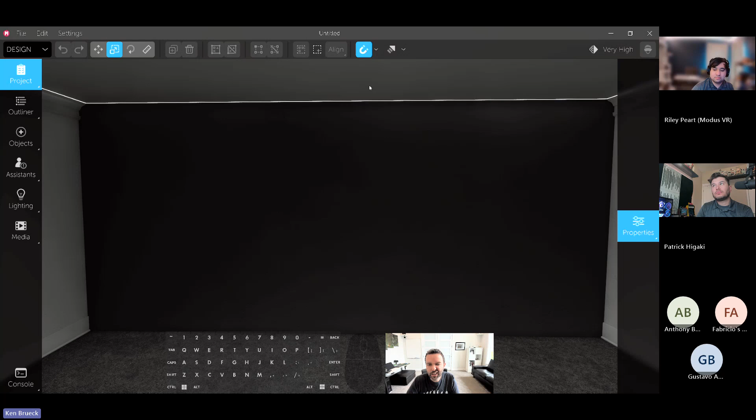The second thing in terms of getting stuff set up is the viewport quality. I came into this room and it is almost pitch black, and that's because we have no lights in the room and we are simulating pretty high quality lighting. So I'm going to go up to this top right corner where it says very high, and that might say medium or something for you. Basically, this is the quality in which Modus is rendering while you are working in Modus.

If we drop this down into med high, the lighting that gets created here is of much lower precision. In fact, you'll even have a perfectly bright room with no lights in it. So this is a great way to get started, but also this is a great way to control the performance requirements of Modus. If you're in a lower quality mode, you're going to have better performance because your computer's not doing as much.

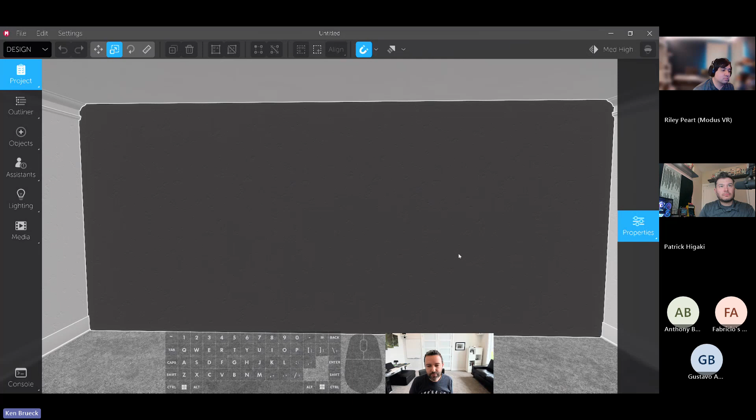Okay, so the next thing we need to talk about is navigation. Now that you have your viewport and UI set up, there are two modes in Modus. There is interaction mode, where I'm working with menus, maybe dragging objects around, and then there is navigation mode. To get into navigation mode, I can press M, and that hides my menu, and now I can look around, or I can just hold the right mouse button to temporarily get into navigation mode.

That's all I'm going to be doing throughout the rest of the webinar, is just holding that right mouse button. Once you're holding it, you look around by moving the mouse, and then you go forward and backward by pressing W and S. You go side to side by pressing A and D, and you go up and down by pressing space and shift. You'll get really comfortable with those over time, but that is it. So again, hold right mouse button to enter navigation mode, then W, A, S, D to go forward, back, left, right, and space and shift to go up and down. That's it for navigation mode.

Now taking a look at the UI here for a moment, in the top left corner we've got design mode. That's where we're going to spend the entirety of the webinar. But if you switch over to photo or 360, which we'll cover in an upcoming webinar in a couple of weeks, that's where you can generate high quality renders or 360s.

Up along the top here, we have lots of buttons for changing modes, deleting, duplicating, turning into arrays, stuff like that. We'll cover these throughout the webinar as we go. And on the left side, we have all of our main tabs for working with the project.

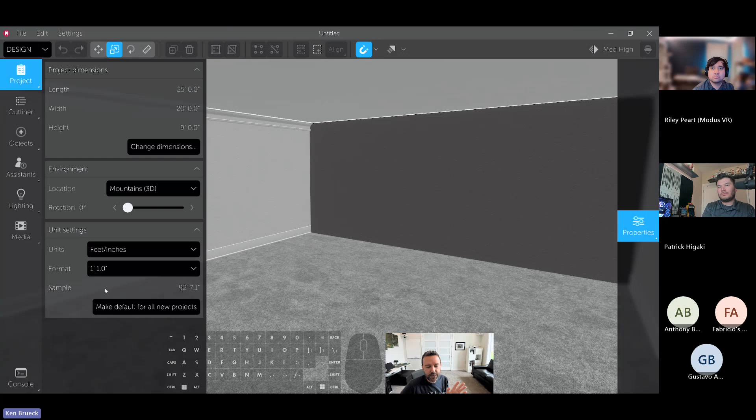First things first, I'm going to change the dimensions of this project. We're going to operate in feet and inches, so I don't need to change this, but this is where you would do it if you wanted to work in metric. Let's change this to be 18 feet wide by 23 feet, and then we'll increase the ceiling height to 10 feet. It's going to fade down, fade back up, and now our room is slightly different.

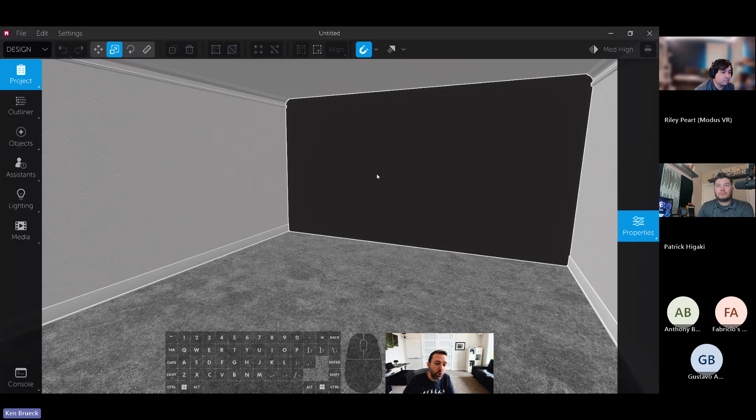Now I'd like to spend a little bit of time dressing the room, getting it ready to add equipment. This part isn't critical, but it does really help sell the story. With Modus, it is such a fast tool, and it is AV focused. You can bring it into basically any scenario where seeing or validating results is going to be helpful.

For example, we see Modus used a lot in pre-sales or even just in conceptualization, trying to see if a certain idea will work, all the way through to generating really polished, high quality deliverables that might go in a room standards package or something like that. Really, it's up to you in terms of how much time you want to spend on any given project, but we think it's usually best to try and spend as little time as possible.

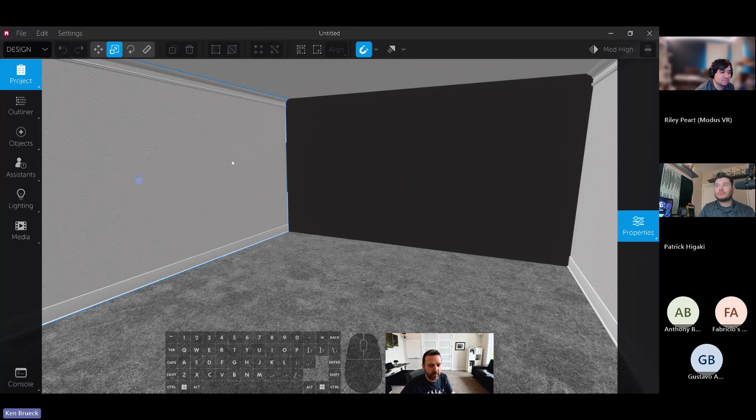Really be disciplined about how many details are important. But to get started, I'm going to select all these walls. I'm going to control click and move around to select all four. And I'm going to come over to the properties panel. To get to that, I just hover over the right side of the screen, and the properties panel is going to change based on what you have selected. So in this case, I have 4 walls selected, which gives me options for the walls.

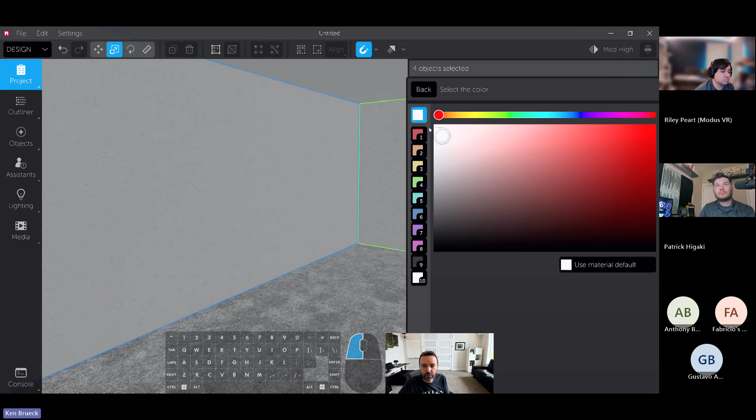I'm going to turn off the trim and baseboard. We're going to keep the material the same, but I am going to change the color so that they are all white. Now I'm going to click on the floor to select it.

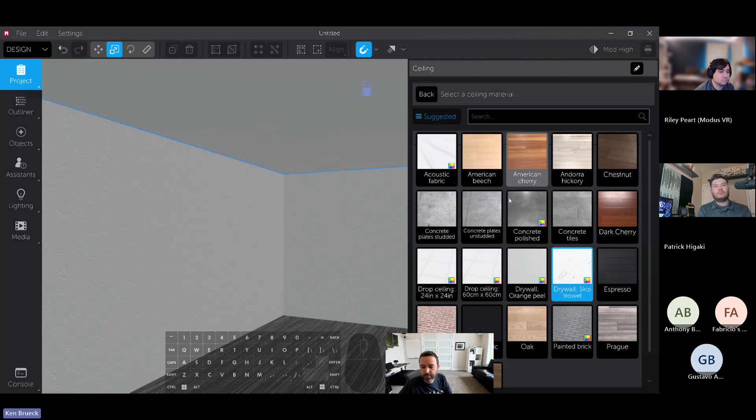I'm going to change its material. When I click on that, by default, I'm going to see just kind of the suggested options for this. But if I wanted to change this to something else, I could hover over here and go up a level and find hundreds of different materials to choose from. But I'm just going to select that carpet, and then I'm going to make our ceiling a drop ceiling. I'm going to pick the 24-inch version since we are doing this stateside for now.

Let's start dressing the room. So I'm going to come over to our objects tab. Modus is an object-based workflow, meaning we're not dealing really with low-level vertices or lines. We are bringing in functional objects.

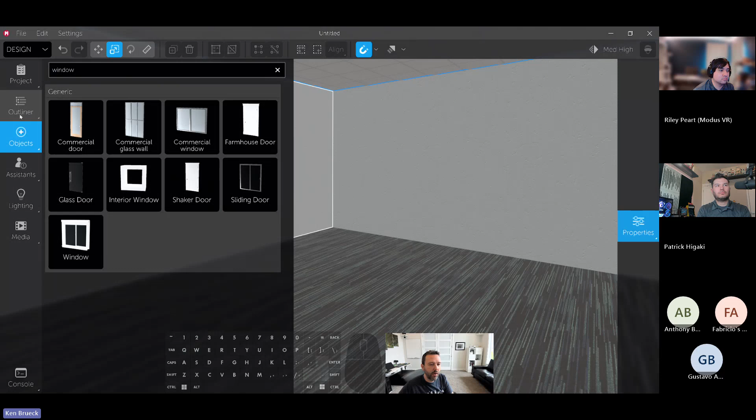So I'm going to type in window here, and I'm just going to drag one in and stretch it out. You'll notice a few things that happen right away. Anytime an object has these little cubes, those are resize handles. So I can grab them, and maybe we'll make this glass fill the entire wall.

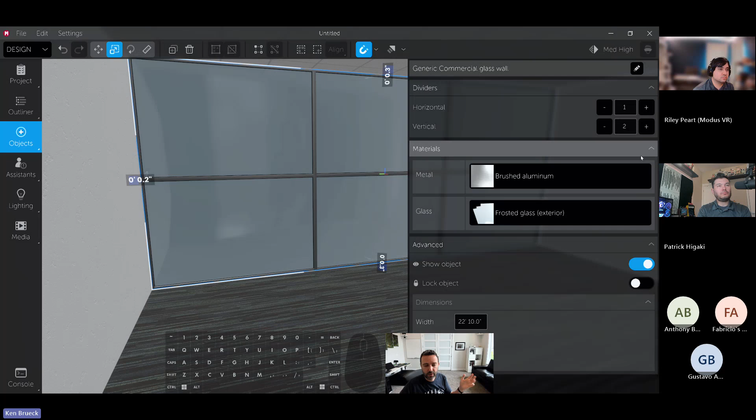Now I'm going to go to the properties panel and see what options I have available here. So these are going to be very different than the ones we've seen so far. And I'm going to change the dividers up just to change the way that looks a little bit. And we're going to keep the metal the same, but I want to change the glass to something transparent so we can see outside.

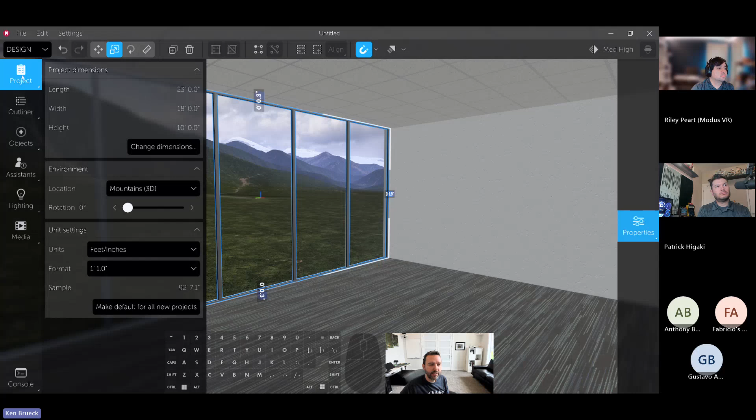This is the first bit of outside that we've seen, and this mountainscape doesn't really match what we would want to show in a commercial environment. So to change that, I'm going to go back to the project tab. I'm going to change our environment from mountains to, we'll do waterfront. We can rotate that a little bit. Okay, so that gives us a little bit nicer of a view.

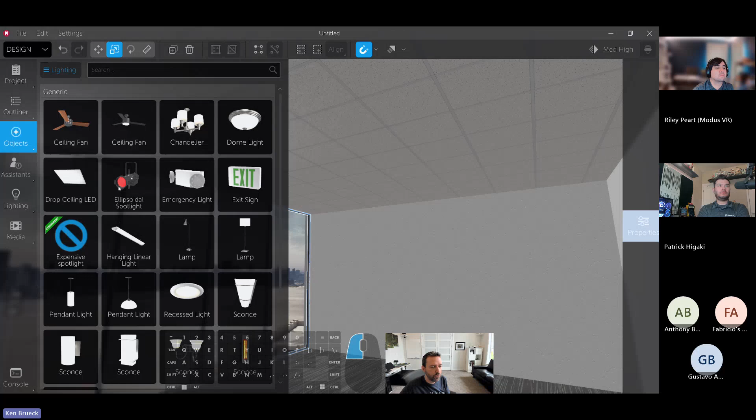Okay, now let's add some lights to the room. So I'm going to go back to the Objects tab, and instead of typing, we're going to navigate. We're going to come over to Lighting, and then we'll do Drop Ceiling LED. So I'm going to toss this on the ceiling.

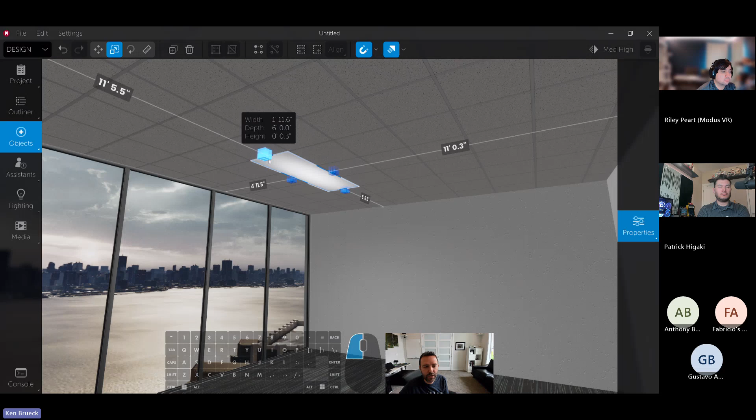Again, I'm going to resize it here a little bit. And since we're working on a 24-inch by 24-inch grid, I really don't want this free resizing. I'd rather it snap to something more useful. So I come up here to incremental moving and sizing. I'm going to enable that. And by default, it's going to set me up to 1-inch increments, but I'm going to put it over to 6. So now when I resize, it's going to snap the dimensions of this object to the closest 6 inches. So now I can get that right where I want it.

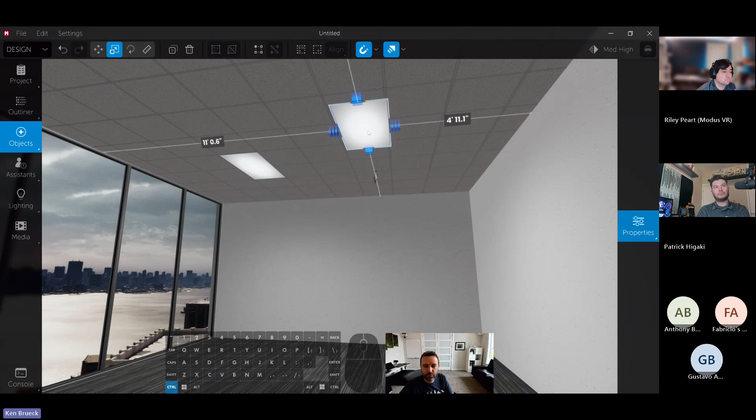And now we need to create multiples of this light. So we've got a handful of ways that we could do that. One, I could just select it and then do Control C and Control V, and that's going to put a light fixture wherever my mouse cursor is. I'm going to hit Control Z a handful of times to undo that. But in this case, I really want to arrange these in a grid and not have to place each one manually. So for that, I'm going to use an array.

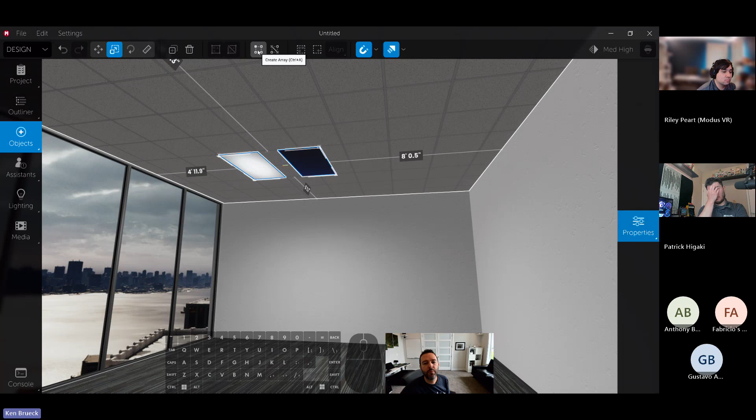So I could press Control A, or I can click this button up in the UI. Once I've created an array of that object, now the thing I have selected is an array, not the light. The light is the reference for building out the array. I'm going to back up here a little bit, get to a slightly better spot.

And we know which one is our reference object because it's full color, and then any copy or clone has this grayish tint to it.

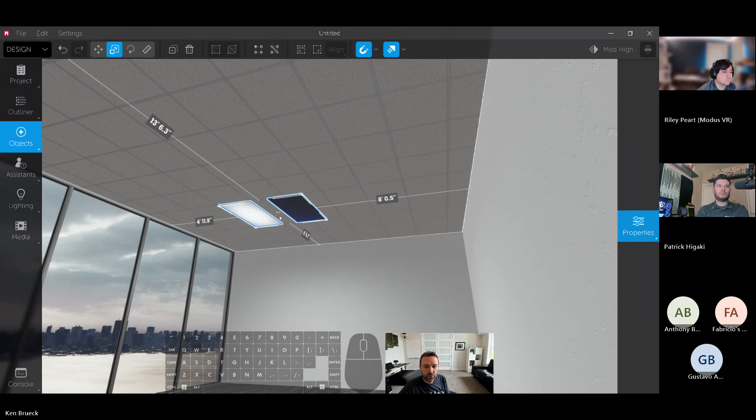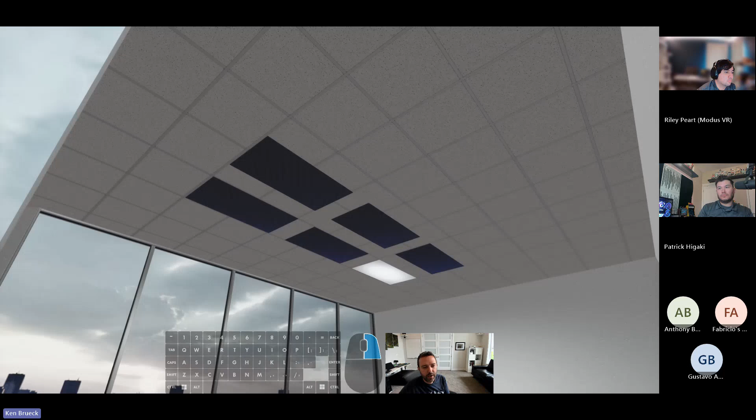But let's say we wanted to have 2 lights along the width of the room and then 3 rows along the length. So I've just updated this, but it's shooting off in the wrong direction. I want it coming towards us rather than away from us. So on the red axis, I'll click flip direction.

Now they're in the right direction, but the spacing is wrong. I'm going to change spacing to 4 feet. Let's see how that looks. Let's change that to maybe 8. There we go. And spacing this way, we'll try 4 feet and see—that does not work. Try 6 feet. Okay, that works.

So once again, now that we have an array of multiple clones, we can see which one was the reference object—that's the one all these clones are created from. When I deselect the array and select something else, they will all look normal.

Okay, so now our room is pretty well lit. At this point, now that we have lights in the room, I want to switch back to a higher quality viewport mode. I'll come up to the top right corner and bring this over to high, or even very high.

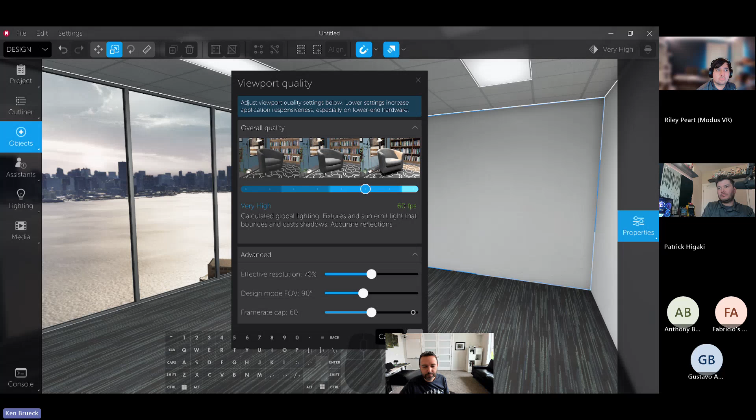Now, once we're in this mode, the change right now is a little subtle, but as we add objects into the room we'll start to see some nice shadows. One change we can see immediately is sunlight.

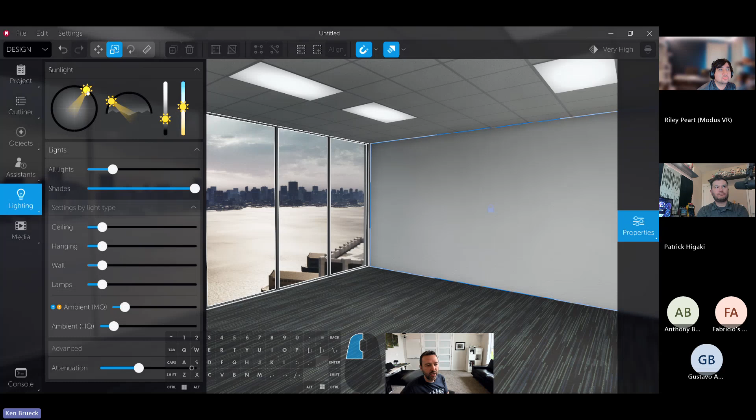So to change that, I'm going to come over to this lighting tab. The lighting tab allows you to control the overall look and feel of the room with respect to lighting. The first thing we're going to do is rotate the sun so it's actually coming and shining into the room here. We have 2 controls for changing the direction of the sun: this is basically the sun orbiting around the Earth, and this one is the sun's elevation.

If we pull the elevation down, we're going to get nice long shadows. If we want it to splash onto a different wall, we'd rotate it. But I'm going to have it splash onto the front wall, because that's such a pesky problem once it lands on a screen, so it's really important to bring that up.

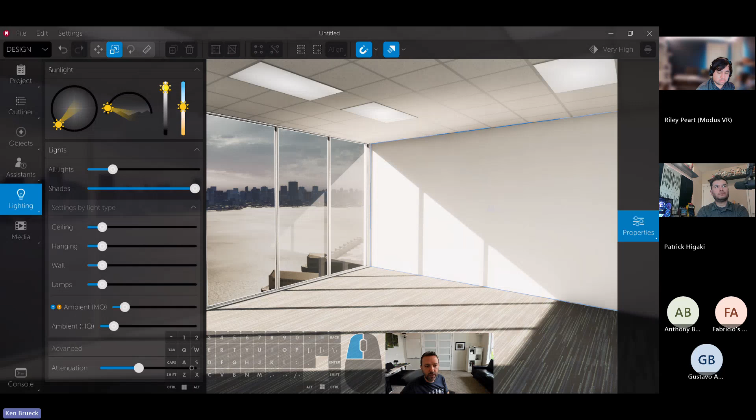And then for artistic reasons, you can increase the brightness or temperature of the sun as well, but usually the defaults are pretty good. The sunlight only shows when you're in one of those higher quality viewport modes—same thing when you're doing renders or 360s.

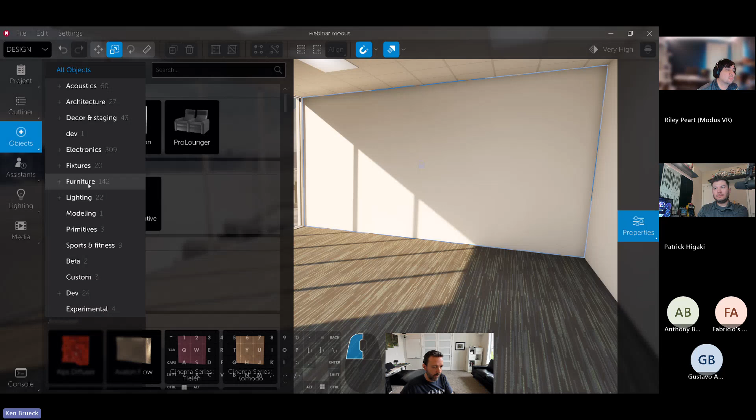Okay, so let's start adding some furniture. I'm going to come back to furniture, tables and desks, and we will add a salamander trapezoid table. So I'm going to put this in place. You'll notice it's facing the wrong direction.

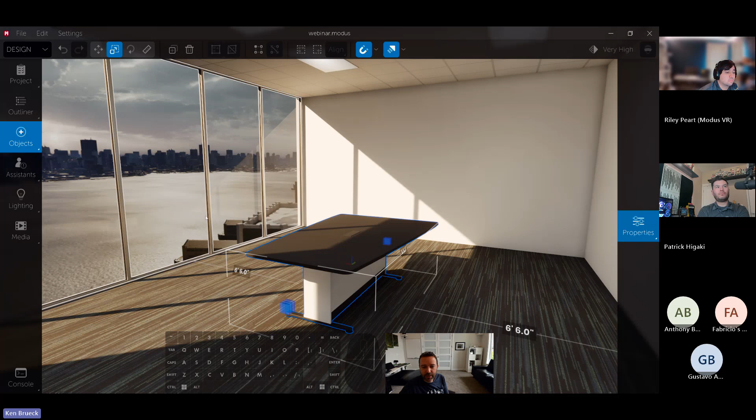I can use my mouse wheel to rotate the direction it's facing, or switch to a more explicit rotation mode with my cursor. Right now we're in resize mode, as indicated by these handles, and I'm actually going to turn off incremental sizing here for a moment. We can also switch to rotation mode by pressing R, which gives us a much more fine-grained amount of control over the rotation.

While we're looking at this, if I wanted to, I could click on this and enter an explicit value, but we're not going to do that. I'm just going to use my mouse wheel, get this in place, and we're in pretty good shape, but this table is not quite the size we want.

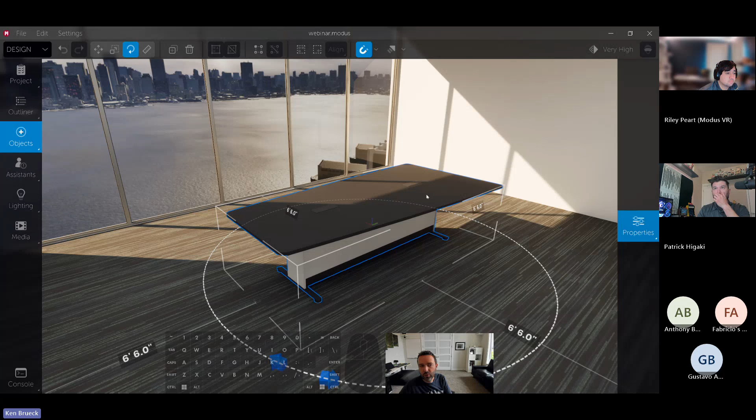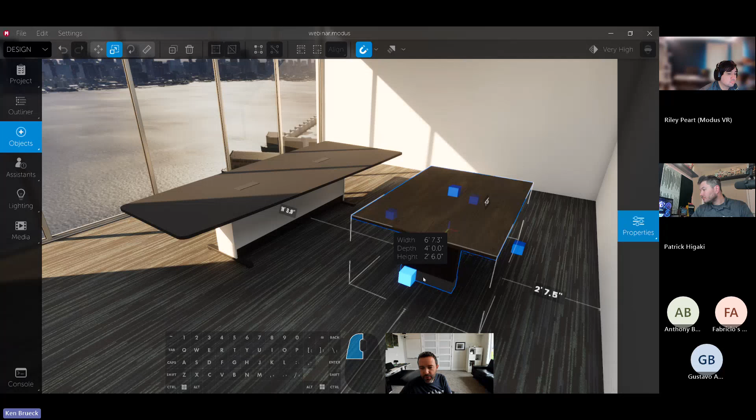So I'm going to press E to go to resize mode, and something interesting is going to happen here. As I resize this table, you'll notice it's snapping to different lengths. If I compare that with a generic table, this starts to show us a really interesting concept in Modus: when I have a generic table in there, I can resize it fluidly to any dimension I want.

I can come to the properties panel and make it any material I want. I could make it out of felt, I can make it out of brick. We can do any absurd thing we want because it's generic.

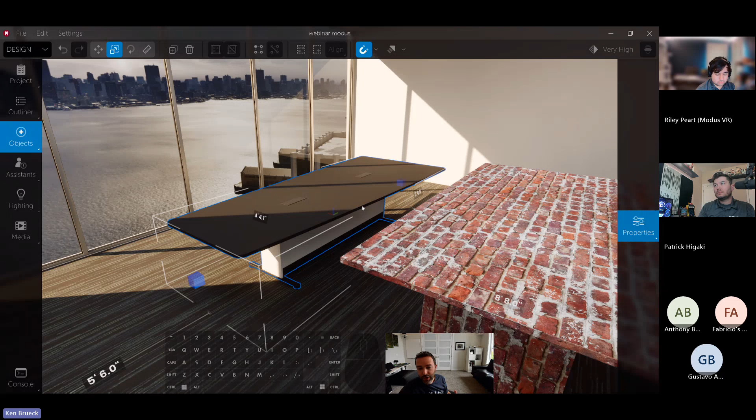Real world products like this Salamander table, or any other branded product in Modus, are restricted in the options presented to you, so you can never configure something that you couldn't actually buy. When I come to the materials options of this table, I only have the options that Salamander sells. I can't configure this to look like it's made of brick or felt. Same thing with the cabinet options.

That looks pretty good. I'm going to delete that generic table, but it's important to understand that duality of real world manufactured products and generic infinitely flexible products exists across all product categories. So cameras, microphones, couches, you name it. We often have both generic and real world products.

In this case, I've moved the table off to the side, but I want to bring it back to the center of the room without changing its offset from this front wall. That's where we get to axis movement mode.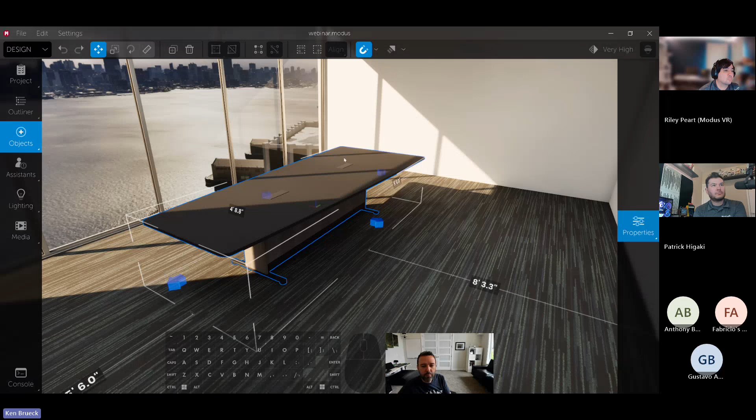So we've been in resize and rotate mode. Axis movement mode gives us a different set of handles. If I grab this table just anywhere on the top, I can move it around freely. But if I grab it on one of these arrows, I can only move it along that arrow's axis. This is a great way to have a little more control over your movement.

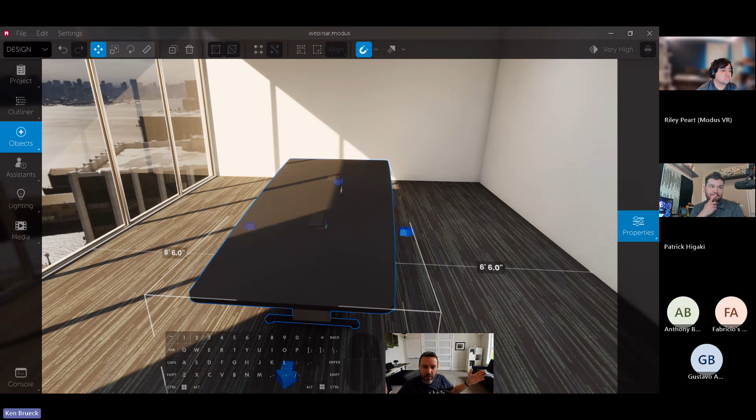I'm going to slide it over until it snaps into place in the center. We're not going to talk a ton about snapping, but the core concept behind it is it's all based on rulers. When this snaps to the center of the room, it's actually snapping in between two objects on both sides. So snapping is based on when these ruler values match, or when they become zero, they will snap to that surface.

You can control all of those things up here in the snapping options. You can change which axes are responding to snapping rules, or click that button to disable all snapping completely. Finally, you could also hold Shift temporarily while dragging to disable snapping.

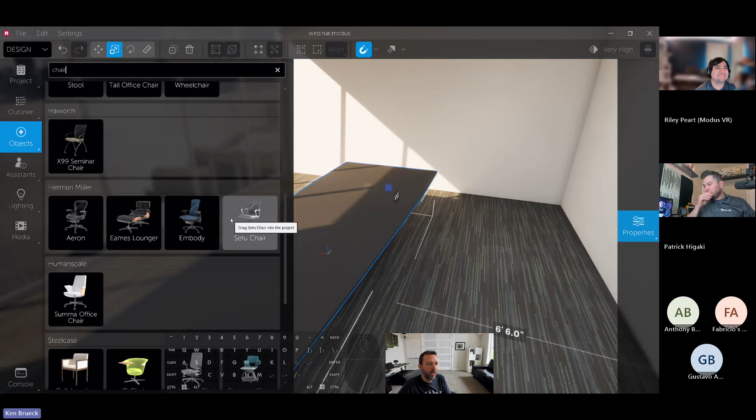All right, so I'm going to bring in some chairs here. Just going to drag one in, use my mouse wheel to rotate. And then another quick way to copy items: I could Control C and Control V to toss these wherever I want, but then it's sometimes a little hard to know where they're going to end up. You can also hold Alt and drag, and every time you redo that operation you're going to get a new version of that object. Then mouse wheel to rotate. It's a really quick and easy way to get multiple copies of something out there.

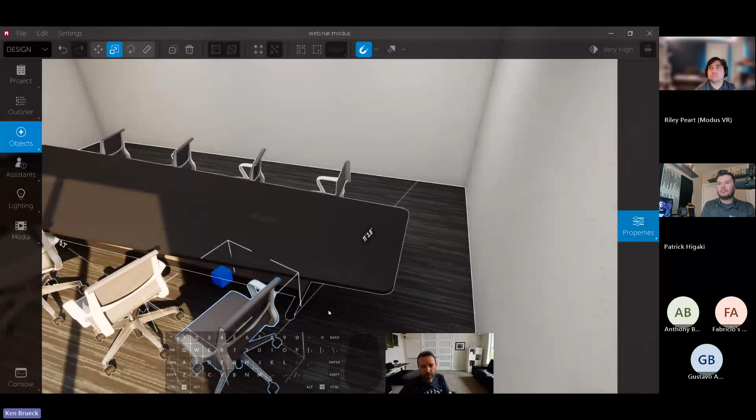And I made this table too long, let's shrink it a hair. One more back there, okay good. And a door... oh no, that's unfortunate, we really need a door. Okay, alright, so I'm going to quick save again.

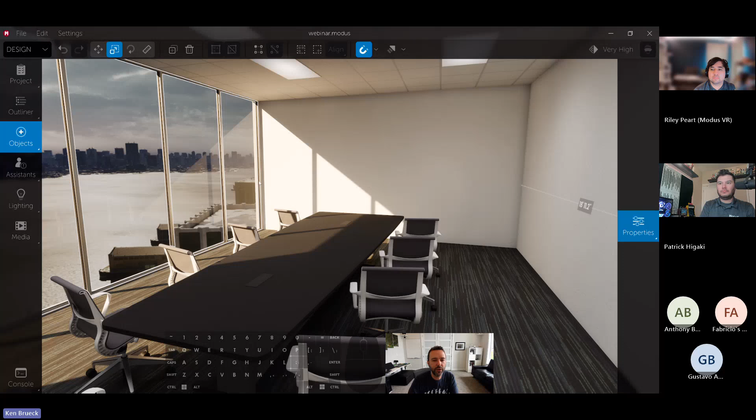Now we'll start talking about AV equipment, because this is really where Modus sets itself apart from all of the other applications out there, since this is built specifically for the AV industry. So I'm going to bring in just a flat panel TV.

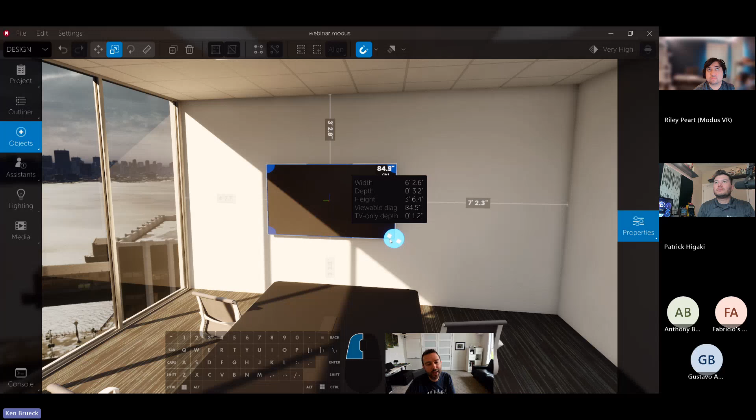Some objects, like displays, may have additional resize handles. In this case, displays can be resized from any corner, and when I resize a display it's going to maintain the aspect ratio it has been set to. But it's really helpful when you have content playing, or it's really helpful when you're resizing a display to have content playing.

That's where we come to the media tab. I'll cover this as quickly as I can, but there's a lot of layers to media in Modus, so it's most important to understand the paradigm. The media tab lets you push content into a channel, and we support 5 channels that playback media.

You push content into a channel, and then a display chooses which channel to subscribe to. That combination allows you to have multiple displays showing different content, but also being able to synchronize content between displays. By default, all displays tune in to channel 1.

If we start playing this gallery plus content, for example, when I hover it over, it's going to ask me which channel I want to play it on. I'm going to click on channel 1, and now it starts playing content right there.

Now, let's say we wanted to do dual displays instead of just a single. I'm going to use the axis arrow to move it over some. Just as before, when I held Alt to create a copy of the chairs, you can also hold Alt while dragging on an arrow, and that will make the copy stay on that axis, which is really handy.

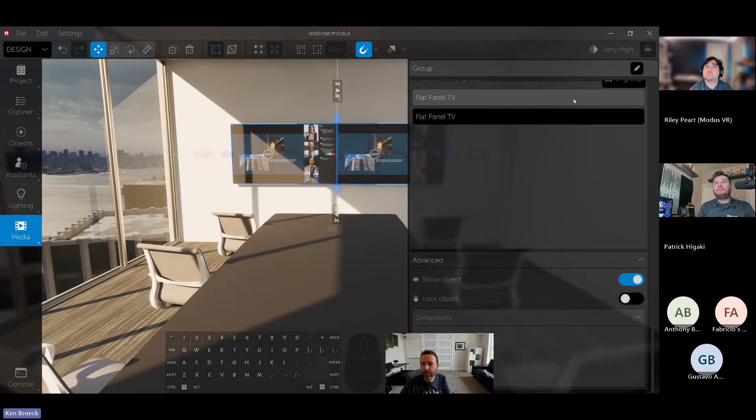Now the second problem is we need to have each of these displays showing different content. So I'm going to shift click to select the display inside a group. Otherwise, it'll just select the entire group. Or I can come to the properties panel and select it like that.

What we want is for this display to tune in as if it were a left display, and we want this right display to behave as if it was a right display. A lot of the media in Modus, particularly those with this little black and blue banner here, can do some pretty interesting things. It's not just static video.

In this particular case, when I come to the display properties, you'll see I can change all sorts of things. I could change its aspect ratio. We could arbitrarily set it to a custom size instead of the random 77.1 inches I picked.

We could also have it tune in to different channels, which is what you would normally do if you want 2 completely different content types playing. But in this case, we're going to use what's called a sub-channel. To get to sub-channels, you expand this channel options section here, and we can change the sub-channel.

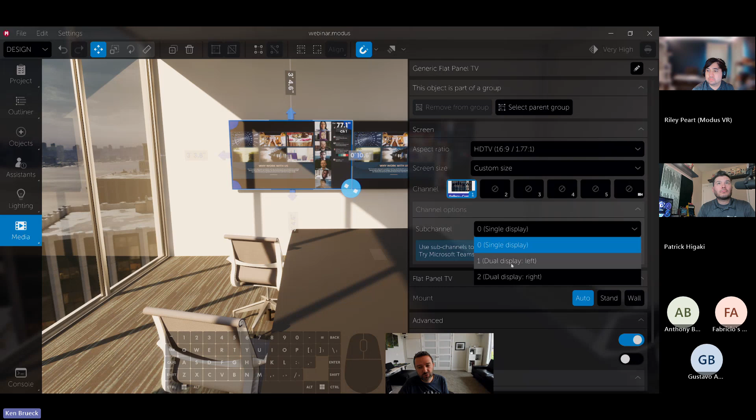Right now, it's saying, I want you to tune in to the single display content of Teams front row. That's the media we're playing. If I expand this, I can instead say, tune into the left channel feed or left sub-channel feed of the Teams video. I can select this display and do something similar, but set it to the right.

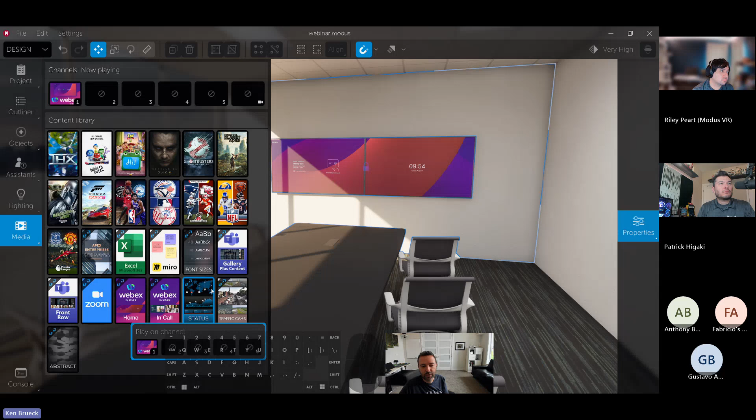And so now we have a great example of what a left and right setup of Microsoft Teams would look like. But now, since these 2 displays are set up to be the left and right, when I come and play something else, like WebEx home screen experience, we could click on that, and now they still maintain their left and right screen relationship, but instead of having to change independent channels, I can just change one channel for it.

Okay, with that set up, I'm going to move this up just a hair, and we're going to start adding some other AV equipment. We'll bring in a video bar for now, and we'll do the Venture video bar. This was just recently added to Modus. As I'm dragging this around, you'll notice we also get these blue swirly things showing up below displays.

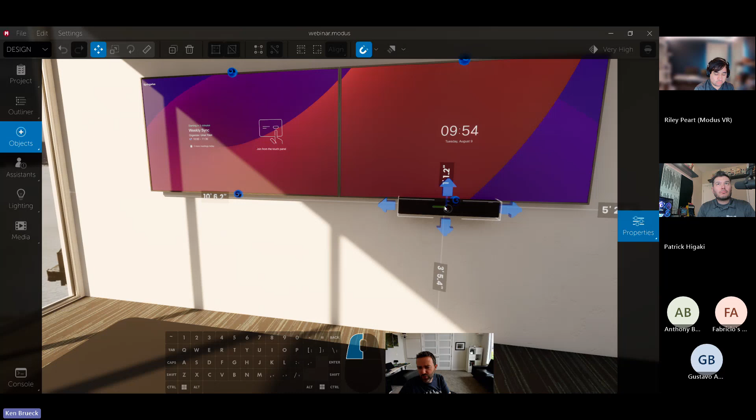What that means is those are snap points, where if I bring this camera to it, it'll snap right onto the bottom of that display, if I can do it right. There we go. And then that camera will use its display mount. It'll move with the displays, but in this case, we're having it centered between the displays.

This is where Modus can become so powerful and save you so much time in discussions. When we have a camera in Modus, when we come to the properties panel, we can start to see things like a camera preview.

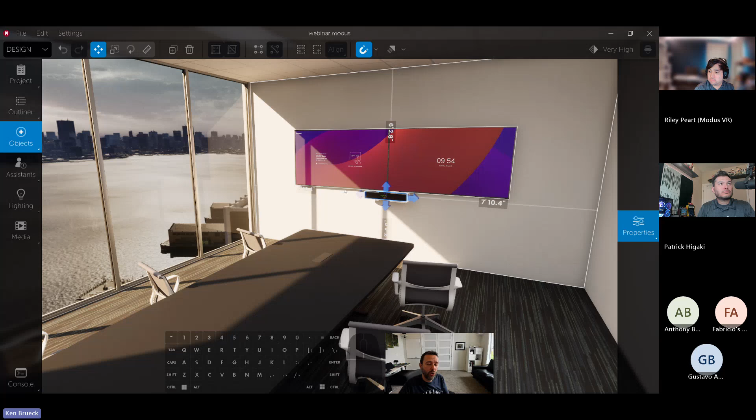Where this becomes even more powerful is if you are showing heads in seats. So to do that, we're going to go to the Assistants tab. We haven't been there yet. The assistants are all about helping communicate good design, but also communicate to your clients why you're making the decisions you are. We're not going to spend a lot of time on these, but we do have all sorts of great ones, even simple things like sight lines.

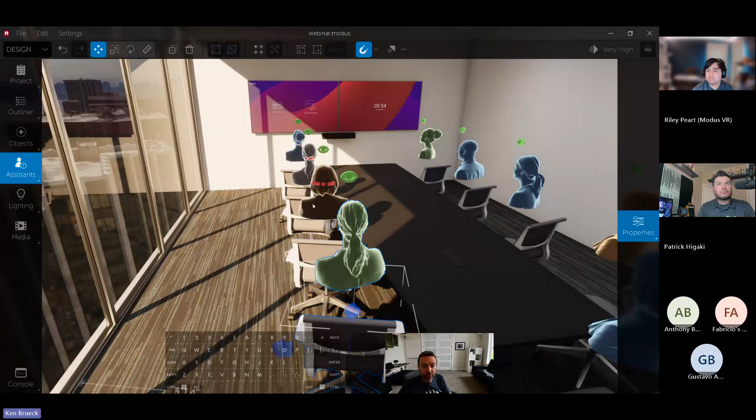For example, we can tell that these three users are having a hard time seeing the left display, and everyone on the right side can see the left display just fine. But if we come over here, we can start to see exactly the problem. So this is a great way to help troubleshoot different things, brainstorm different solutions.

But for now, we're not going to worry too much about any of these specific assistants, and instead we're just going to do facing screen. So this has everybody facing the screen. And now when we come over to preview our camera view, we can see exactly what this view is going to be like. There's a couple problems here.

The biggest being one that we can see under the table. So this is a really big problem, and we'll workshop solutions for that in just a moment. But I do want to point out really quickly that this is an accurate view of what that camera will show. So for example, we have all of the proper specs for pan, tilt, and zoom, as well as the correct lens behavior. And of course, we can also see exactly what that digital zoom is capable of.

If we were to bring in, let's see, a Rally camera, something that has a lot more pan, tilt, and zoom, we can really start to see exactly what that camera is like. Key takeaway here, though, is you can very quickly communicate to your clients why they might want a camera above or below a display, why they might want one model over another, and quickly be able to experience what types of trade-offs might be involved based on those decisions.

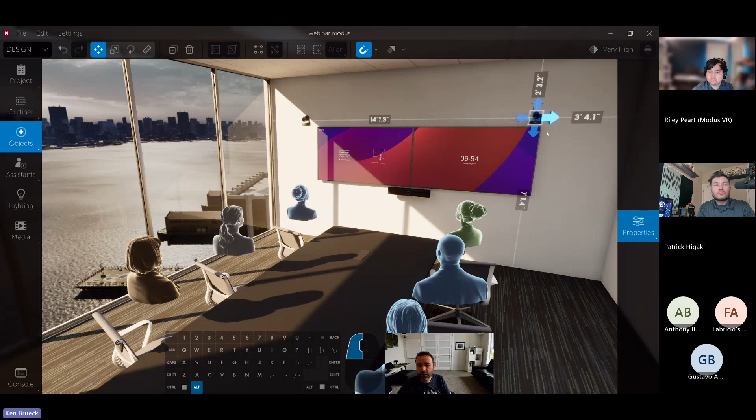It also helps a lot if you're doing a multicam system and you need to illustrate what that experience is going to be like, which cameras are going to be looking at which people, and so on. Really powerful. Okay, so let's just say that we're happy with that video bar, though.

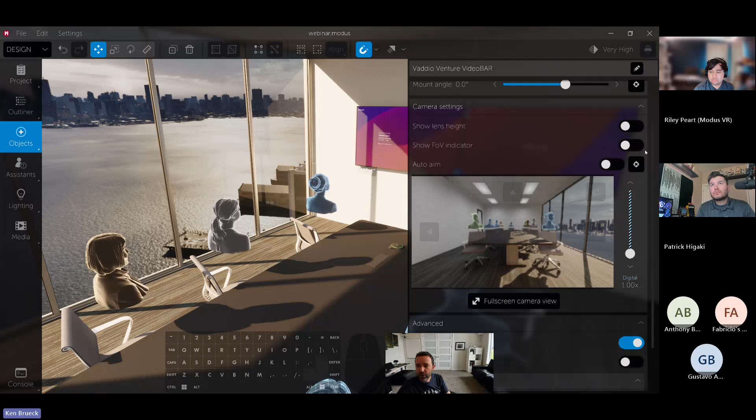Let's move over to microphones. So we can start off with a really simple one. I'm actually going to bring in a generic conferencing microphone, and this is where a lot of Modus's visualizations come into play. So with cameras, for example, we can also show the field of view. You can see how well you're doing. You can do the exact same thing with microphones. You can show the pickup pattern.

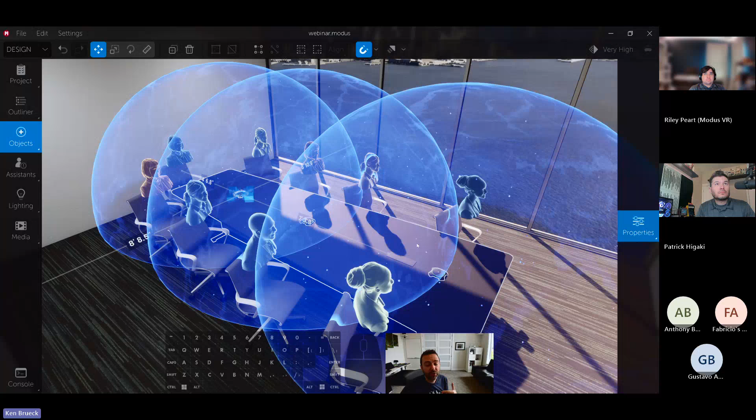Since it's a generic microphone, we can change the spec. Perhaps we're trying to match a microphone's performance that we don't have the actual product in Modus for, for some reason or another — there's a great way to do that. But this way we could very quickly determine how many microphones we would need to have proper coverage. And your stakeholders can see that and understand it without getting lost in jargon or anything that specs can often do.

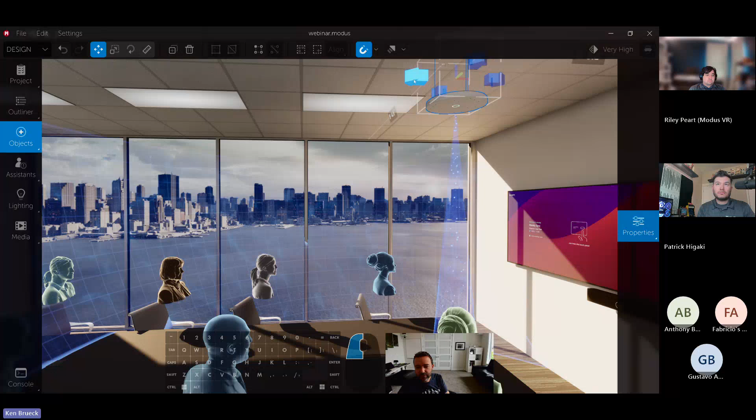But more important, this really helps out with more capable microphones that might have a more complicated story. So for example, the Sennheiser TCC-M. If we were to bring this in, in addition to looking correct, we can also change its mounting abilities and things like that. But we can show its microphone pattern and show exactly how this microphone is going to behave. So in this case, we'd probably want to bias this forward just a little bit, but at this height — well, even if we were to lower it, we'd probably want to use the TCC2 rather than the TCCM for a room this size.

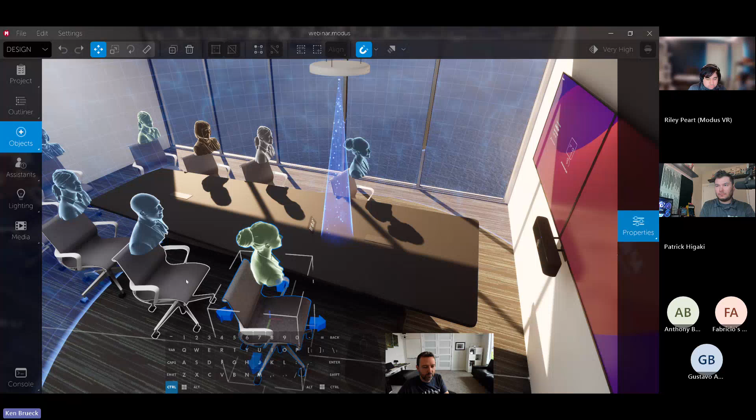If that's not an option, well, we could also solve our problem of being able to see under the table by moving the table forward and scooching all of these chairs forward as well.

There we go, that actually solves two problems in one. Now we can't see under the table, and we're just barely within that microphone's stated pickup pattern.

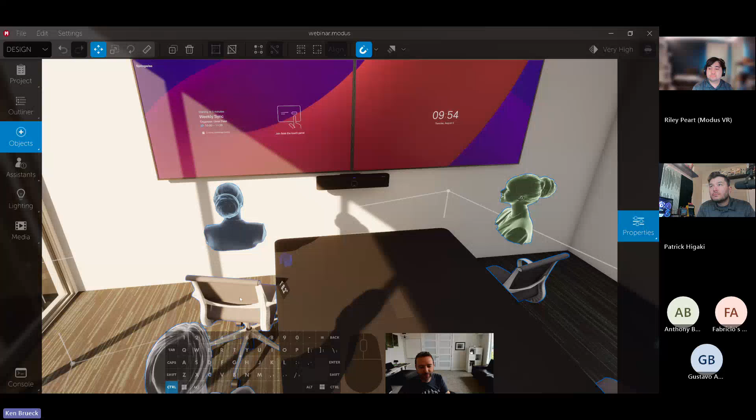Now here's something interesting though, and this is where Modus can become so powerful. Sometimes when you solve one problem, you introduce another. These two people in the front are clearly way too close to this display, and also probably too close for the camera to pick up comfortably. Yeah, they're kind of pushing it.

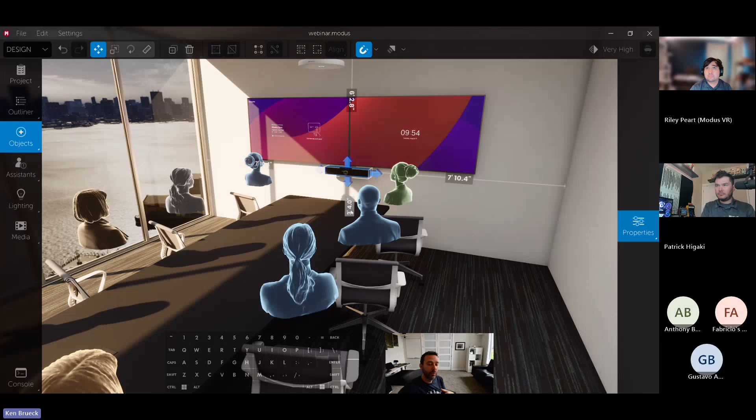So when I mentioned early on that Modus is a great tool for validating ideas and brainstorming concepts, this is exactly what I'm talking about, where you can try out a piece of equipment, see how it's going to do, and react to it on the fly. This is often a very powerful thing to do live with the client, because they can see things, you can point out problems, or at least let them be aware of compromises that might be made so they can go into the project eyes wide open.

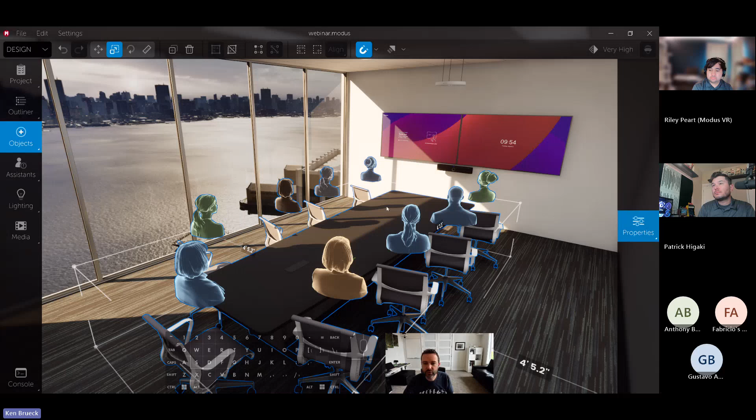Now let's imagine a new or prospective client has come in and they want you to do a room standards package, and one of their requirements is a medium-sized room, but theirs is slightly different dimensions, where ours is 23 by 18 by 10. Maybe theirs is 25 by 16 by 9.

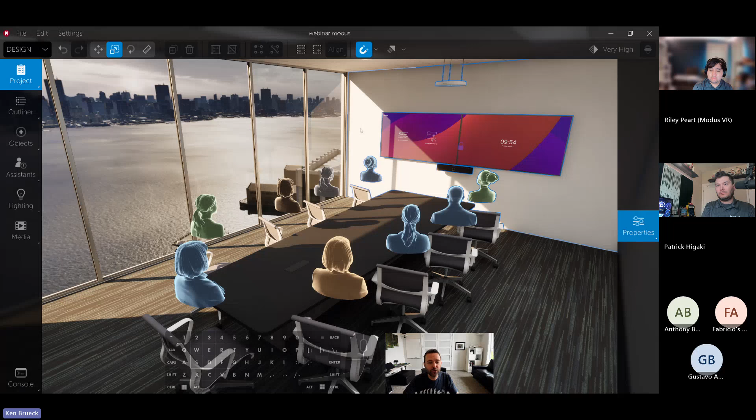What you would do in that case is you would open up this project. So this is a new day, you're just opening up this project. And you would come in and say, okay, well, let's change these dimensions. Let's instead make this, I think I said 16 by 25 by 9.

And a few things are going to happen. Some stuff is going to shuffle around. Our door is now in the floor just a little bit because we resized the room underneath it. Our table is actually a decent height and our room is narrower, but it still works.

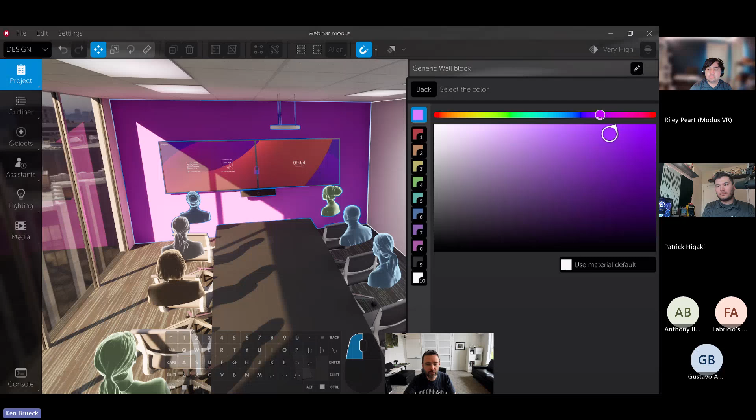And maybe they've got some branding in here, we'll try and match Cisco there just a little bit. That doesn't look great, but that's okay. And maybe it's a hard floor or something like that. And maybe they want to have a different table and they'd rather have...

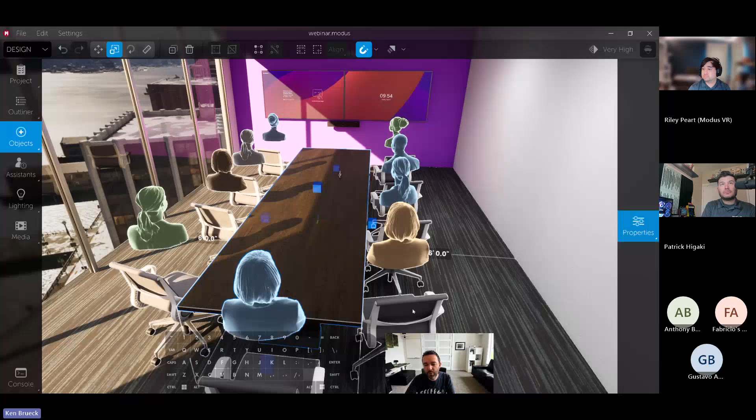I don't know, we'll just toss in a generic conference table. Anyway, so then in just a few moments, you can go from one design to something pretty different in just a matter of a couple of minutes.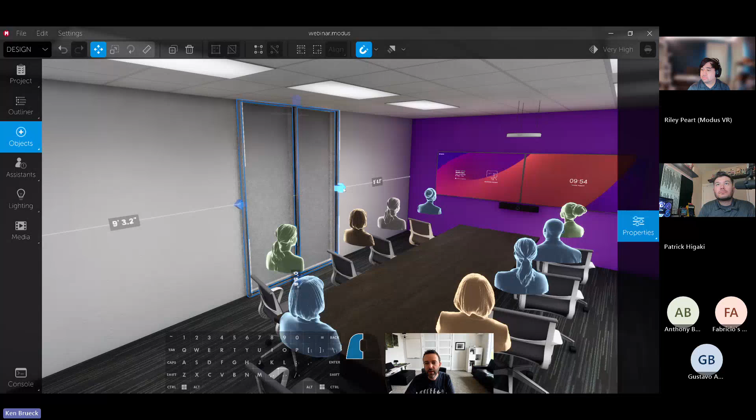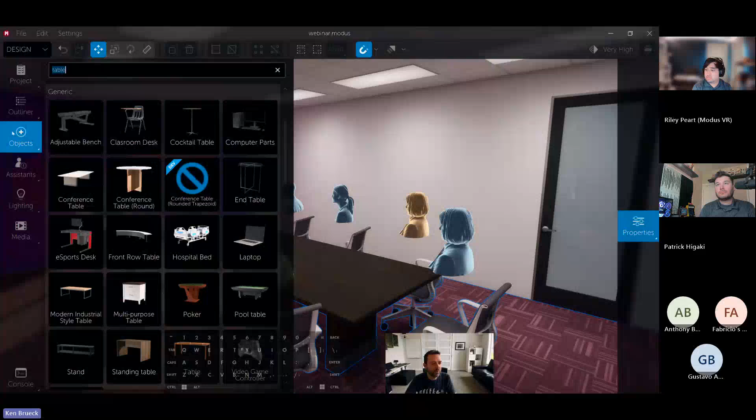And that's really where we hope to see our users leveraging the power and speed of Modus the most, by reusing good design principles across the board, saving time, but ultimately getting the client on the same page about what it is that they are going to receive. And if you can do that quickly, you can wow your clients because you just gave them bespoke images, but also you're saving yourself a lot of time and headache because you're not having the same conversations over and over.

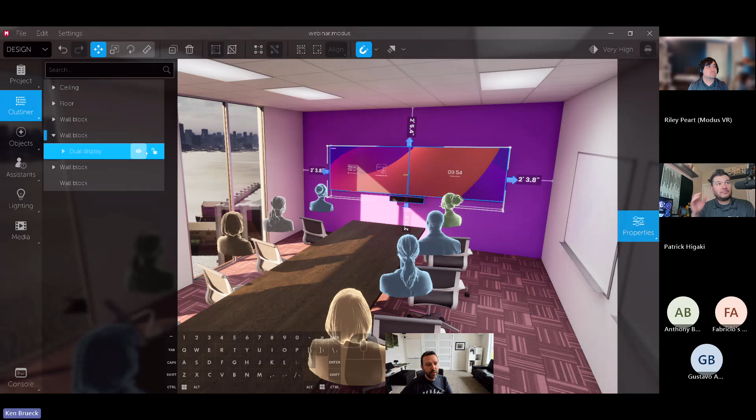Here's where groups can become really powerful in combination with the outliner. I can hide that entire group. I'm going to add the video bar to it, and now we'll call this dual display. So now I can turn that entire thing off, and we could instead perhaps say, what if we also had a video wall up here? And we want to kind of have two different options, just doing a good, better, best type of thing.

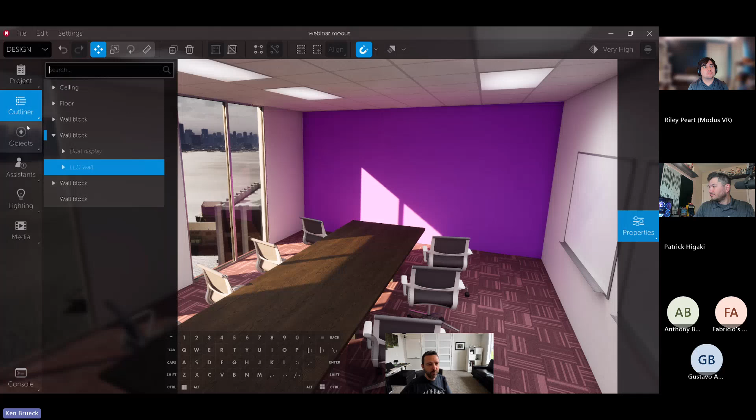Let's just say I'll bring the rally cameras back. So now we've got flanking cameras on a huge display. This is a lot pricier of an option, so we'll call this LED wall. Because both of these are groups, I can come back and forth between these really quickly, which is one great use case for groups and the outliner, just showing and hiding things. There's also a hotkey for showing and hiding, that's Control H.

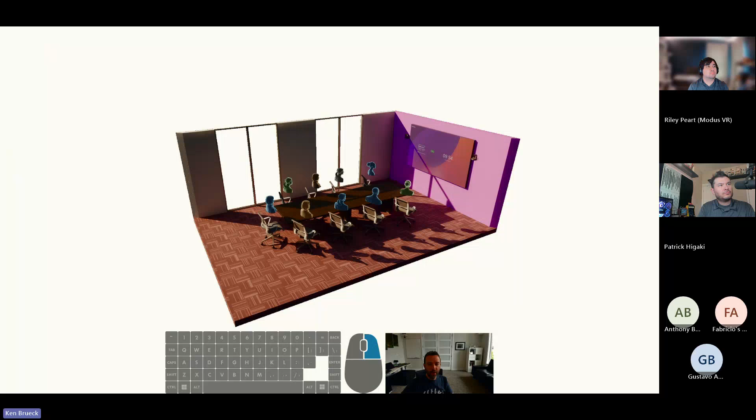In addition to that, you can also start doing some really fun things like isometric views. For example, if we wanted to hide this wall, I can press Control H, hide the ceiling, press Control H, and hide the back wall, Control H. By changing the project to perhaps a white background, we now have a pretty cool isometric view. These are just another great way to present concepts to clients, because they can see everything all at once from the outside.

So the outliner offers a lot of power and flexibility. It's super cool, it's still pretty new to us, and we're excited about it. But I would be remiss if we didn't tackle it at all. So I'm glad we had a couple extra minutes there.